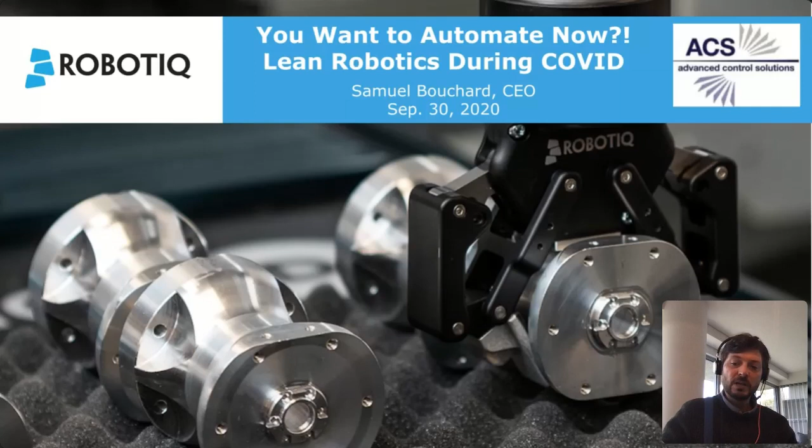Just to complete the introduction, we're a manufacturer of plug-and-play components for cobots. ACS is one of our expert partners in the US, one of the great partners with a lot of expertise. Our end users are manufacturers, and we sell our products everywhere around the world.

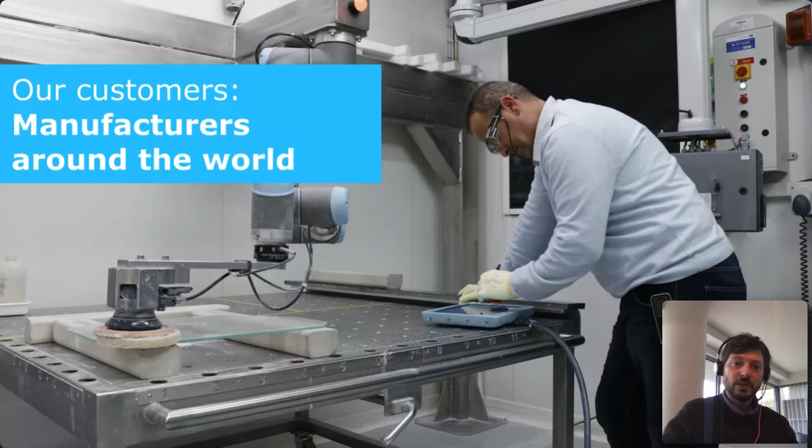Our company mission is really to free human hands so people can do more, so companies can be more productive. So far we've freed more than 10,000 hands, meaning we've sold more than 10,000 units, and we've touched more than 10,000 projects.

So what I'm sharing with you is really some of the best practices, some of the good ideas that we've seen, and maybe some of the pitfalls too that we've seen that we should avoid.

You see here a few examples of the kind of products that we make: grippers, cameras, force sensors, always with an easy-to-use interface for collaborative robots. What we want to do is perform the manual task on the factory floor with these products, but in an efficient way so you can start production faster.

One of the challenges in deploying cobots is really going from the cobot—the arm and the controller—to the full application. That's really where we want to contribute and help you, and so does ACS: how to go from the robot to really the robot application.

That's the idea behind Lean Robotics. Lean Robotics is really a guide to making robots work in your factory, and the goal, again, is to help you start production faster, just like it is the goal for our products.

So what's included in this book, and we'll touch on a few of them today: first, there's the step-by-step guide—what is the process from A, I got an idea, I want to deploy, to Z, I got a working, productive robot. There's also some project management tools, and some good tips and principles on how to get started and how to scale.

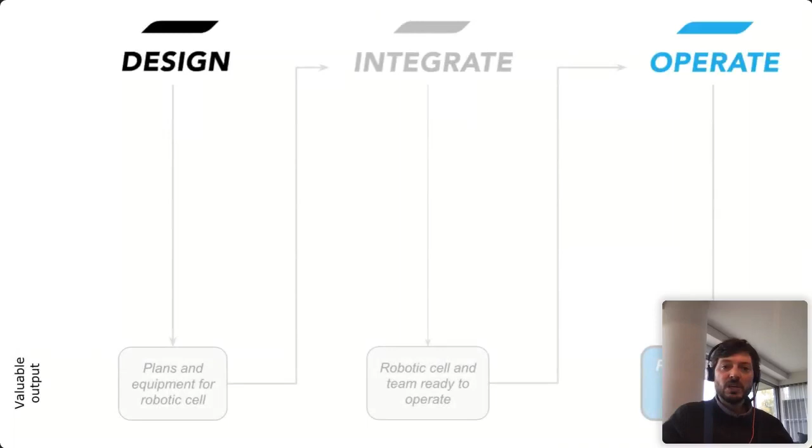I will not go through the whole process—it would be a little dry for a webinar—but that's really the whole idea: how do we go from design, to integrate, up to the operate mode, and how do we do this as efficiently as possible?

If you're interested in getting into the details of the process, I invite you to look at the book. We also have some material and training available, but I just wanted to give you the overview to begin with.

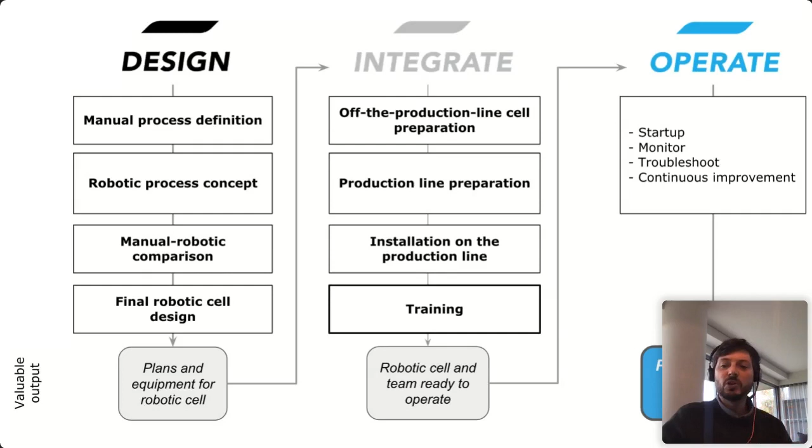Obviously robots are great, they're fascinating, they move just like humans, but in the end they're not a goal in themselves. They're just a tool that you can use in your factory, and this tool has to serve your company objectives, your company strategy.

Just to get you involved and to get a better understanding of your interest in deploying robots, I would do the first poll, Kel, looking at what are the motivations—why you're looking to deploy robots, or why you're already deploying robots in your factories.

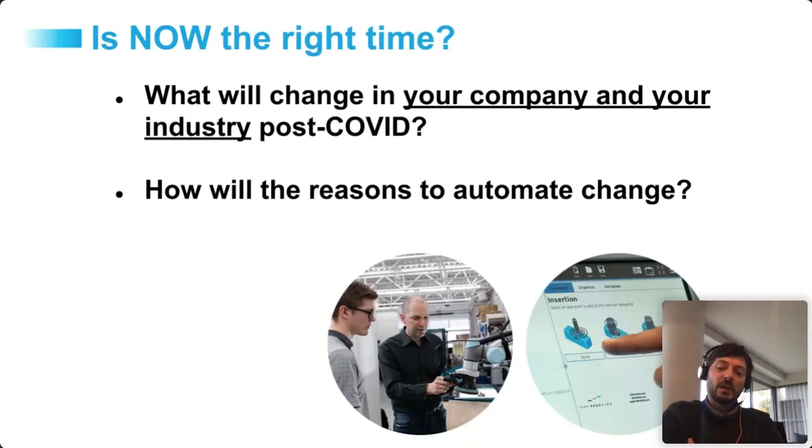Many of them were challenged with supply chain issues, so they're really thinking about how we can use automation to improve business continuity, reduce some of the risk associated with our supply chain, maybe manufacture more locally but at a decent cost. Also, we have some big end users with very big initiatives to bring in robots now because they see that physical distancing is going to be a thing for the next year or so from their estimate. So these are all new reasons why people are looking to automate these days.

So my prediction is that obviously the robotics industry right now has slowed down because demand for many manufacturers' own goods is going down, so many companies froze their capex for this year. But if we look at what happened in 2008 and 2009, the robotics industry dropped and then bounced back very strongly. Our assumption is that it's going to do the same thing this time, but potentially even stronger because of all the new reasons to automate.

One thing we've got to keep in mind if you're automating is you're changing the type of labor. You're going from manual labor to the robot doing the job. But you're going to need people that have the robotic skills to take care of these robots, to design the projects, to maintain them, and to do the programming. That shift in skills in your factory, going from manual skills to more knowledge-based skills, people able to use the robot, we really expect this is going to be a key ingredient if you want to deploy automation, if you want to deploy robotics. You really have to keep this in mind.

And obviously, if you don't have that know-how right now, there are many ways you can acquire it. You can outsource it, you can hire people, or you can groom your people. But this won't happen by magic. If it's important for you, you have to keep it in mind and have a plan for this.

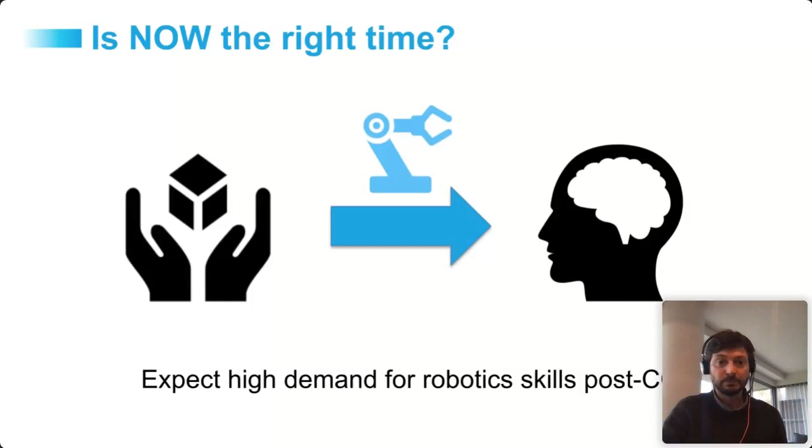So our business and ACS's business didn't go to zero during COVID. We still have a very good level of business, not as strong as it was in February and March. But what we're seeing is that there are a lot of people deploying robots these days.

Maybe I'd like to get a few examples, Kale, of some of the companies locally that are deploying robots. Yeah, we've had a variety of companies, different industries, that have been taking advantage. Some of the obvious ones - there's a new manufacturer of PPE equipment in Alabama that we're working with that recently purchased 9 collaborative robots to help in the manufacture of different protective equipment.

But we've also seen areas such as - and we took advantage of Robotiq's Finishing Copilot - an application where we're grinding weld seams down on an aluminum plate. It was an application where during remote work, people were needing to be at home and rotate through, they needed to be able to get this task done. They didn't have anyone to come on site and reliably, day after day, fulfill those orders.

The other thing they wanted to make sure of, as they brought people in, they were getting inconsistencies. As they rotated through during the pandemic, one person doing the job one day and another the next, they'd get different qualities of the grind. So in that case, we used a UR10 with Robotiq's Finishing Copilot to reliably and consistently, part after part after part, provide the same quality for those weld seam grindings. It's really been dramatic - just a huge variety of industries that have popped up needing these types of solutions during this time period.

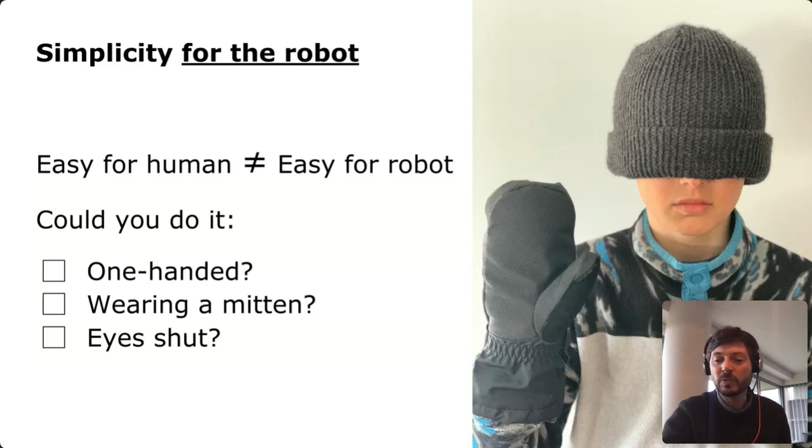If it's your first project, reach out to folks at ACS or at Robotiq to look at the manual process with videos, and we can try to evaluate with you the feasibility of it. So what's easy, what's hard will depend on the task itself.

Robots are really good at moving always to the same starting point and end point, following the same trajectory. So picking and placing, following a path without applying forces - anything where you need to apply forces is a little bit more complex. Not that it's impossible, but if you have to choose between something that's just motion repeating, or applying forces, or adapting the motion all the time, it's much easier to repeat all the time.

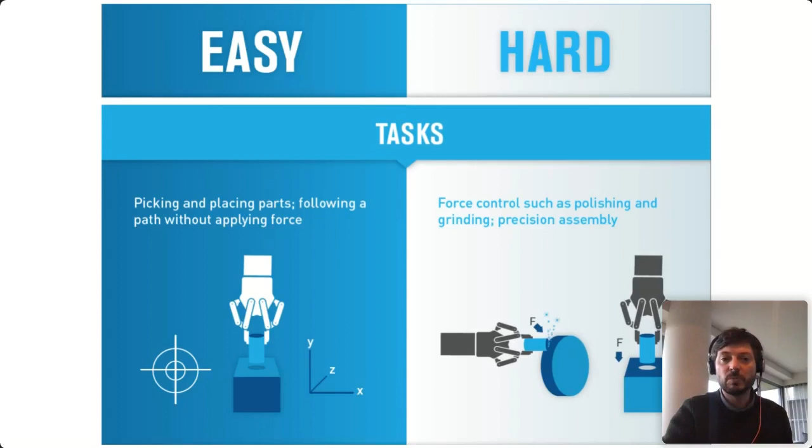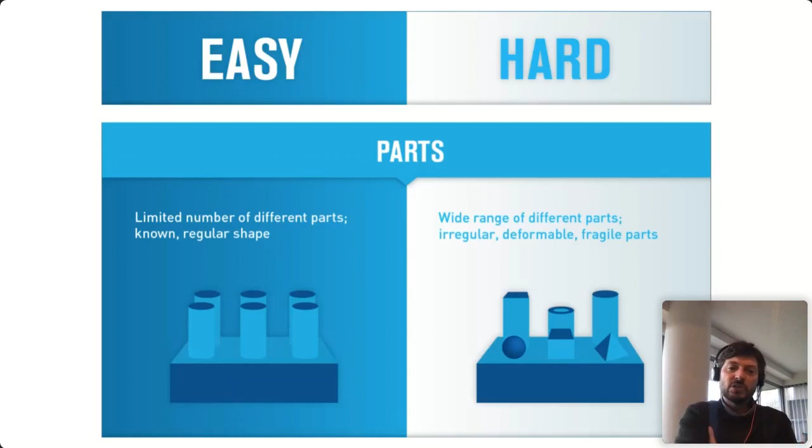The part that you're handling will also play a role in the complexity. If you have a limited number of different parts, known parts, regular shapes, it's easier than having a huge variety of irregular, deformable, or fragile parts, for instance.

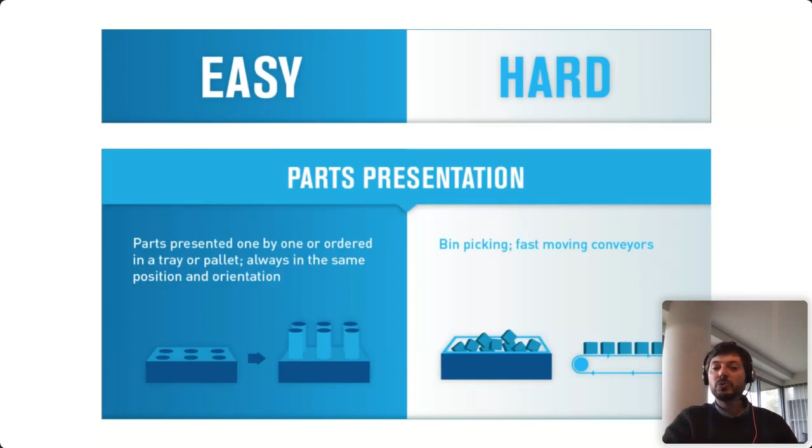Something people don't realize at the beginning is it's not about picking the part, but really reaching the part. Is the part presented in a structured way, or is it presented in a bin or on a fast-moving conveyor? Everything that's more structured is easier for the robot. So if it's placed in a tray or always in the same way, it is easier. Again, not that it's impossible to do the other way, but if you have the choice on your first project, I would encourage you to go on the left side.

On the programming side, everything that's repetitive is easier to program. If you have a lot of programming, a lot of different conditions, a lot of sensors involved, it is more complex. For those of you who had the chance, like I did, to mentor a first robotics team, that's something you realize when you watch kids programming their Lego robots. As long as it's about controlling the motors to do a certain number of turns, things are very easy. But you really see the level of complexity increase when they start to have more complex programming.

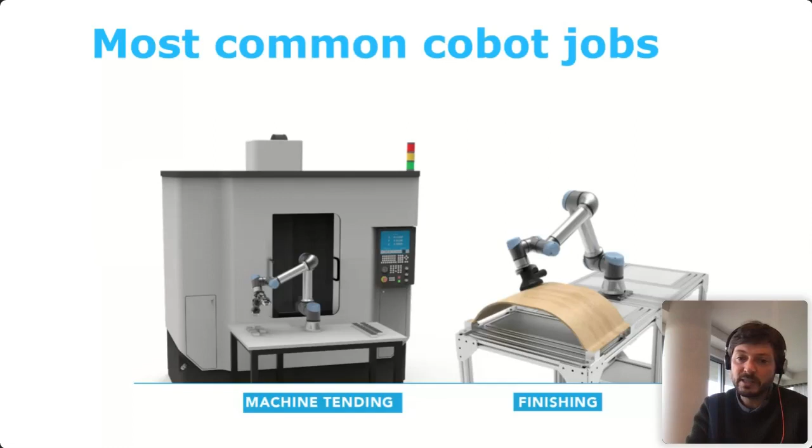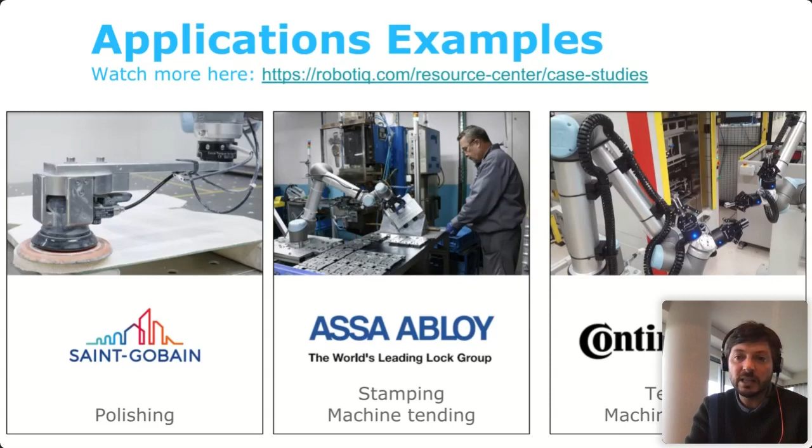Some common jobs: pick and place, simple assembly, putting parts into machines, some finishing. These are jobs that Cobots do all the time, and that can be done with the UR and with the Robotiq products that ACS is providing. If you want more concrete examples, we have a huge section with several case studies where manufacturing engineers, their managers, and operators talk about their approach to their projects and the benefits they got. I have 3 examples here, but there are many more if you follow this link.

So the first tip was to start simple. The second tip is very consistent: it's to keep it simple.

What people call in product development feature creep. So you start a project but you don't close it, you just add to the scope all the time. Don't do that with your first automation project. Really make sure you have a clear understanding of your definition of done, and focus on delivering this and having the robot start to work before adding features.

It might be tempting, but keep in mind that one of the beautiful things about cobots and cobot applications is that they're easy to use and easy to adapt. So it's better to deliver something that provides value and then iterate and improve it as time goes.

We have many customers who did it successfully. They deliver the first application, it works, but maybe not at full capacity, maybe at 60% of the capacity, but still it starts bringing value. Then with a few continuous improvement projects, they bring it to 100% of the needed capacity. So start simple, but also keep it simple.

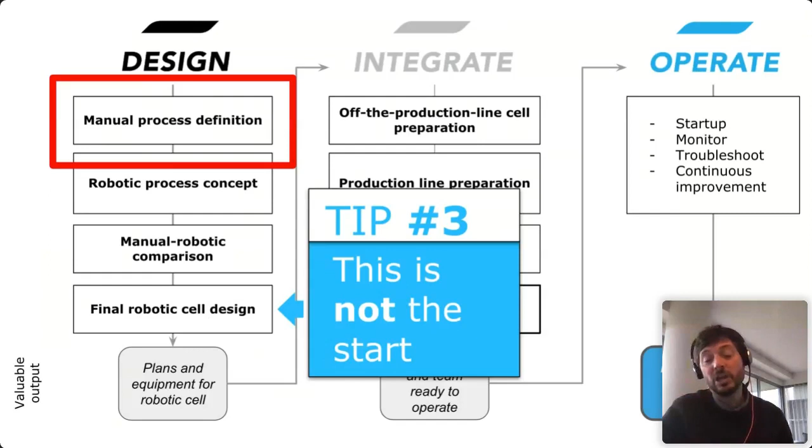To have a successful robotic cell deployment, you need to combine three skill sets. The first one, you already have, and it's the most critical: you have to know and master your manufacturing processes. They have to be standardized, and you have to master them well. Then you need robotic skills—how to design and program these things.

And then you need to know how to do project management around robotics. But if you've done project management around introducing new machines or new types of automation, you already have a good part of this skill set. On Lean Robotics and leanrobotics.org, we have a little checklist of the skills needed to deploy robots, so you can do a quick self-assessment.

It's important to look at whether you have these skills, and also whether you have the bandwidth. Be realistic—if the people you dedicate to the project are playing firefighters again because they have so many other machines to keep running, be realistic there.

It might be better to get help from an external resource, maybe especially for the first project, to increase the bandwidth you have and also increase that skill set during this first project. That's something we've seen many manufacturers do very successfully—combining external resources while keeping their team involved, to increase capacity and skill set at the same time.

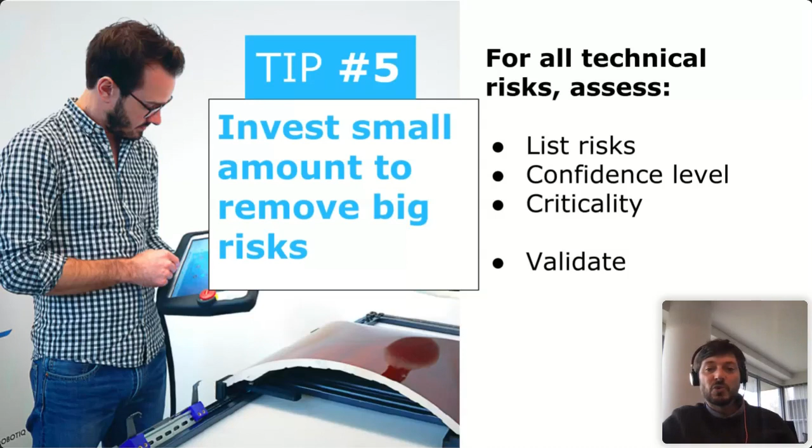Along those lines, I think it's critical that you stay away from custom engineering as much as possible, because everything custom can bring a lot of waste to the deployment process. We're really obsessed in manufacturing with efficiencies on the production floor, but sometimes we don't have the same rigor in our engineering projects. We should be as rigorous and realize that we bring a lot of waste in these projects, and doing custom work and reinventing the wheel is one way to waste a lot of time and opportunities to create value for our business.

If you do a lot of custom work, you have a lot of design time, custom fabrication leading to lead time that slows down or pauses your project. It's longer to install, longer to program, because these custom products won't be plug and play. You'll need to build custom training, and you won't be able to leverage troubleshooting resources and documentation that's already done. Same thing for certification, same thing for maintenance, etc.

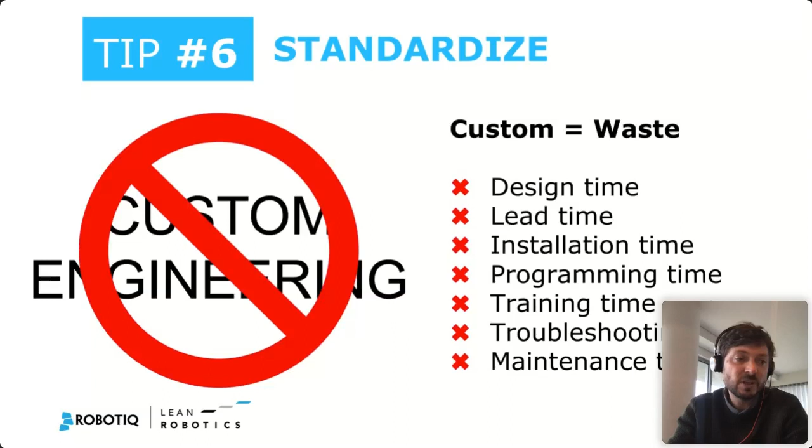So I really encourage you—I'm a strong believer in standardizing on basic building blocks that are standard. I understand every application is going to be different, but that doesn't mean you need to start from scratch all the time. That's exactly what we offer with plug and play components.

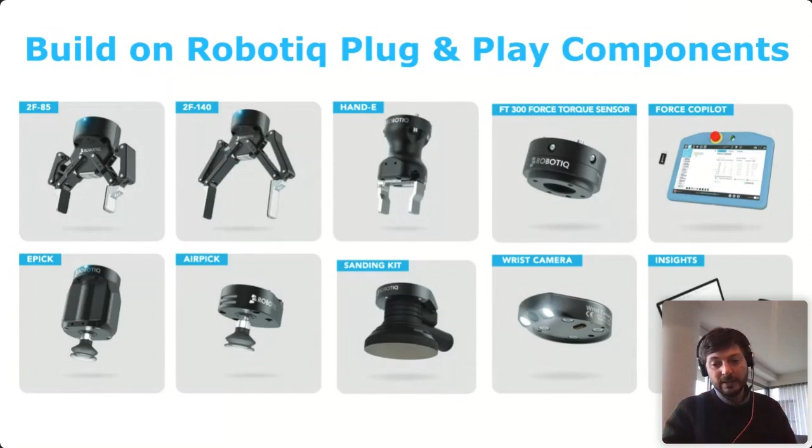Obviously, robot applications are not as self-contained as a cell phone, but still we should build on plug-and-play components. That's really the core of our philosophy: providing these plug-and-play components so you understand the manual task, can pick and choose components, rapidly come up with a proven design, and rapidly deploy them to start bringing value and gaining efficiencies.

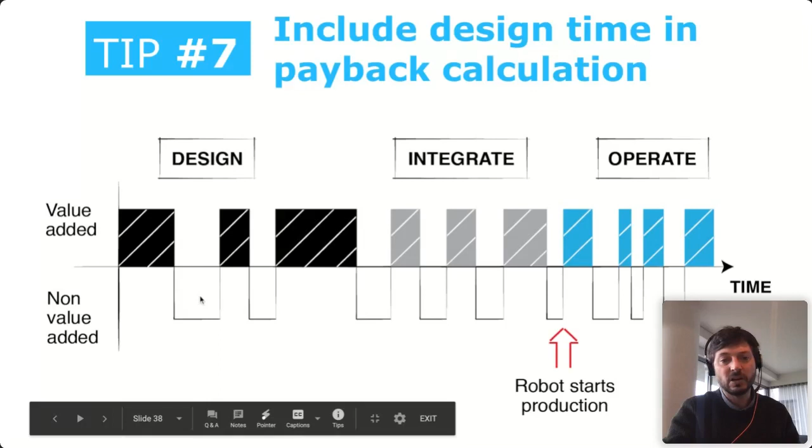Quickly, the last few tips. This comes back to the point I mentioned earlier: try to be as rigorous in your engineering work as in your production operations. Keep in mind that all the waste in the design and integration phase creates delays, and if you can eliminate these delays, then you have a robot that starts production faster and can start bringing a return on investment faster.

Typically, when we do a payback calculation, we forget that first design and integration phase. But if you reduce that design and integration time by one, two, or three months, you gain that many months' worth of production that your robot is providing to you. So it can make a big difference in the ROI calculation.

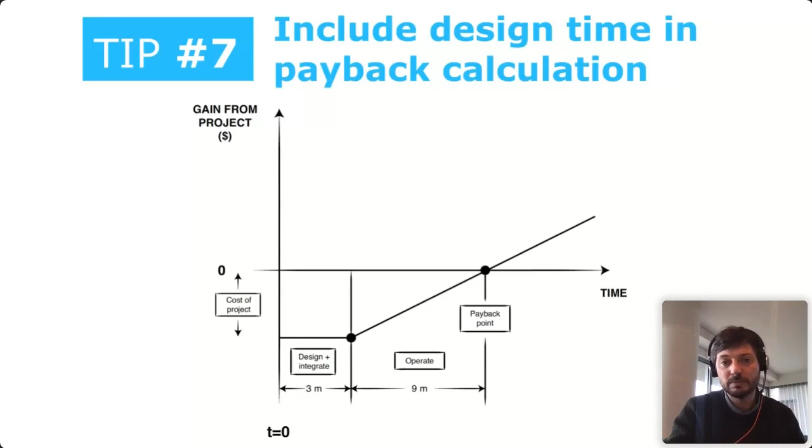And the last one is more on the human side of things. Again, the technology can do part of it, but the know-how and the people will make a huge difference in your automation effort. While in the past you were competing for manufacturing talent and manual workforce against factories in your locality, for robotics know-how you're competing with the big tech companies who've been attracting robotics talent for several years now. When I was a grad student 15 years ago, these guys were already recruiting the best talent in robotics. So you're competing with them for robotics talent, as well as with other factories.

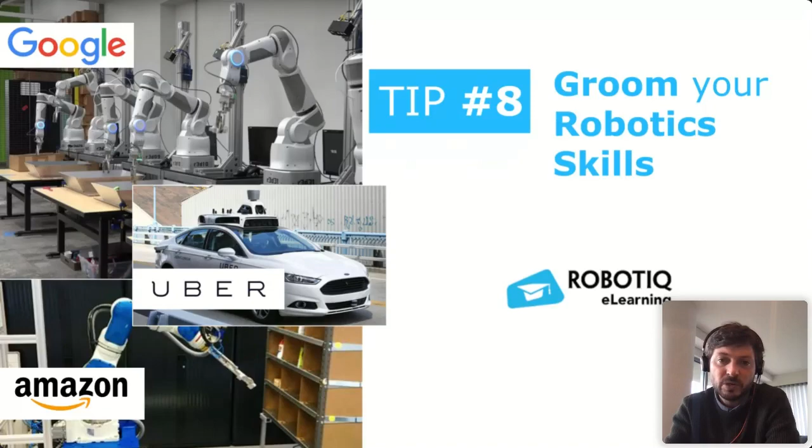So I really encourage you, if robotics is important, invest in grooming your robotic skills. Make sure you include this in the development program for your people. We can help you do this with learning resources. And a final note, try to keep a few minutes for questions.

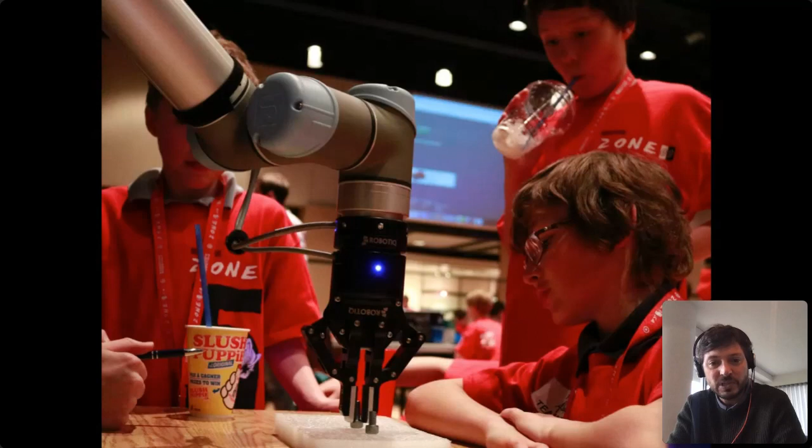And this is what kids look like today. If you have the chance to get involved with these youngster initiatives doing robotic contests and things like that, you'll see that they're really passionate about robots. So robots can be a great tool to increase productivity, increase quality, consistency, reduce cost. It can also be a great tool to bring some youth and energy and dynamic people to the factory floor, which I strongly believe is very important for the future of your company.

So these are the final words. I would be happy to take any questions if we have some on the chat.